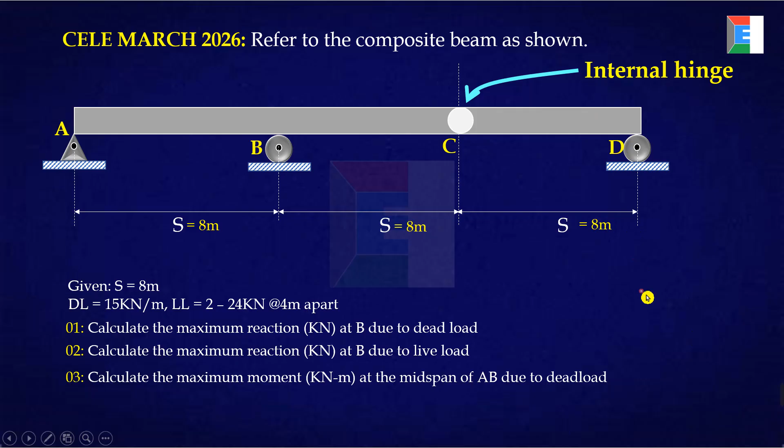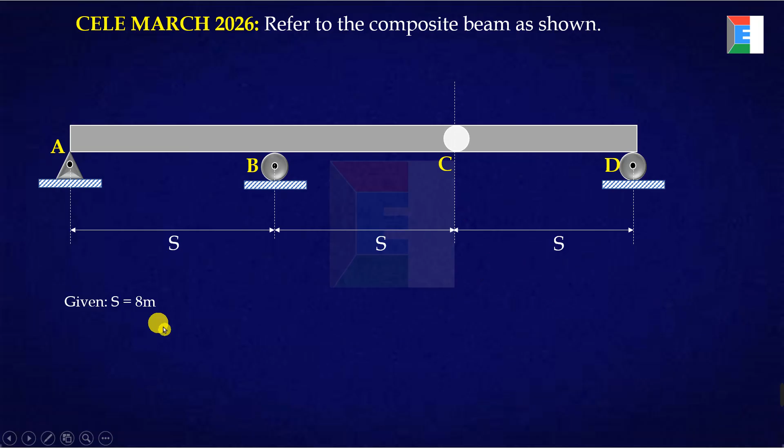Okay, so same problem, referring to this composite beam. The S is still given. So we have this beam, then we have supports here, and we have an internal hinge here. The span is 8 meters.

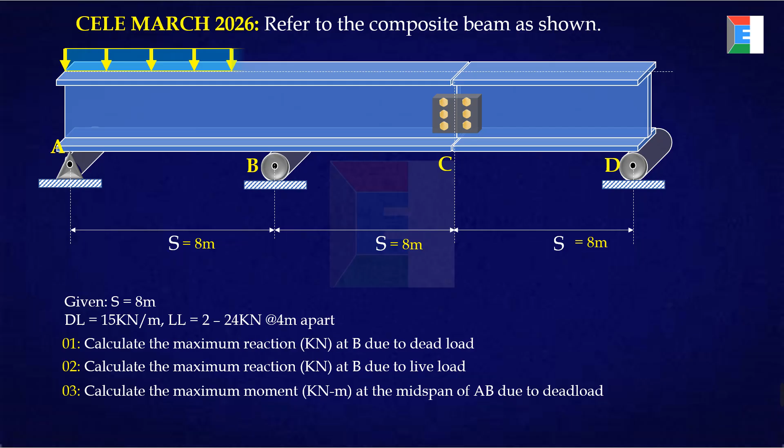Let me put that down first. So let's start with number 1: calculate the maximum reaction at B due to the dead load of 15 kN per meter. When we analyze this, we separate it.

So we have the dead load of 15 kN per meter here. Let's take this part first. This will act as a simply supported beam loaded with a uniformly distributed load of 15 kN. So we have a reaction here, Dy, and another reaction here.

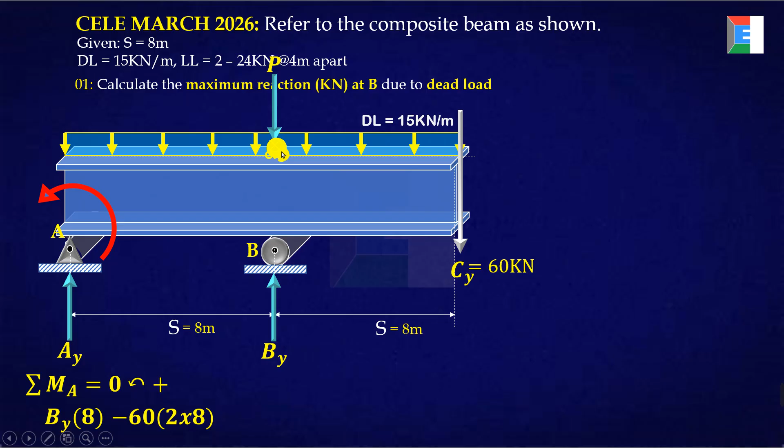So we have 15 times 16 here, and its perpendicular distance going to point A, which is 8. So this is still minus: minus 15 times 16 times 8. Clear? Then we have no other force left.

So we can now set it equal to 0. Using our calculator, let's solve that. Let me double check: times 8 minus 60 times 2 times 8 minus 15 times 16 times 8 equal to 0. That should solve it.

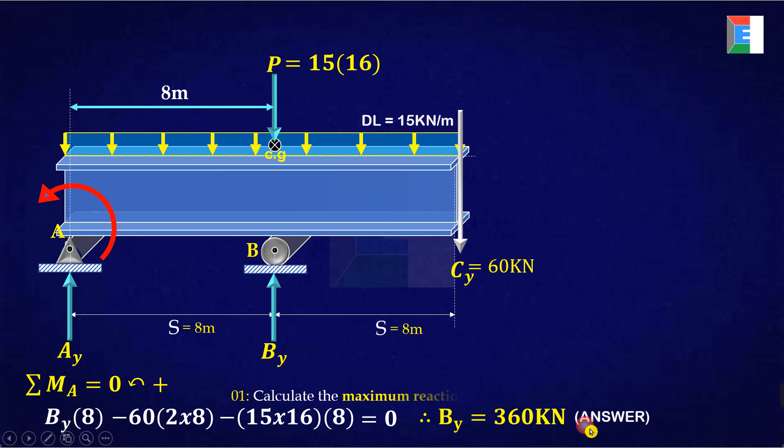We get 360 kilonewton. Since the result is positive, it means our assumption of going up is indeed correct. So By is indeed 360 kilonewton going up. This is our answer to the question about the maximum reaction at B due to dead load, same as the influence line we solved in the previous video. Check that previous video.

Okay, let me also solve for Ay since I'll need it for the moment. I'll solve Ay using summation of forces vertical, going up. So I have Ay going up, and By going up, so that should be taken as positive. I have 60 going down, so that's negative. And I have 15 times 16, which is also going down. I think there's no other force, so we can set it equal to 0.

Then we substitute By, which is 360, here. So it becomes: AY plus 360 minus 60 minus 15 times 16 equal to 0. Using your calculator, the answer you get is negative 60 kilonewton.

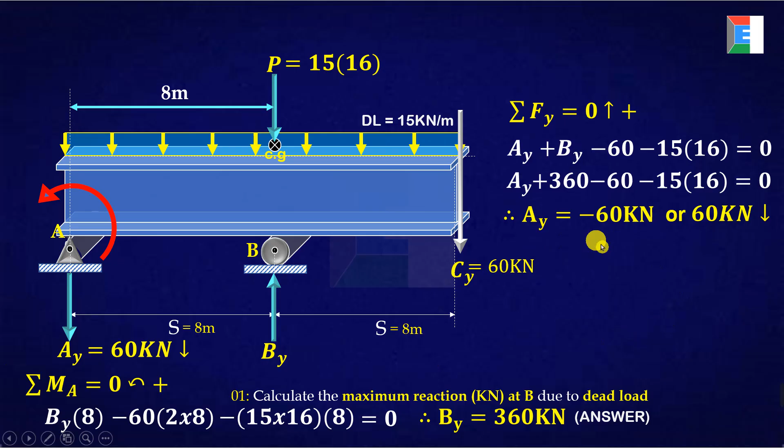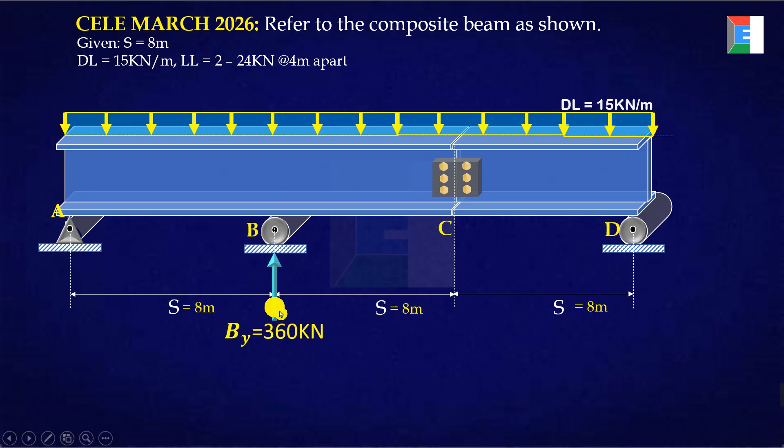Anyway, let's sum up all our support reactions. For BY, we have positive 360. For Ay, we have negative 60 kN downward. And we have 60 here, which is the shear we got earlier for CY. And then here, we have DY.

Ngayon, i-next natin, i-compute natin yung problem, yung part 3, which is to compute the maximum moment at the midspan due to dead load.

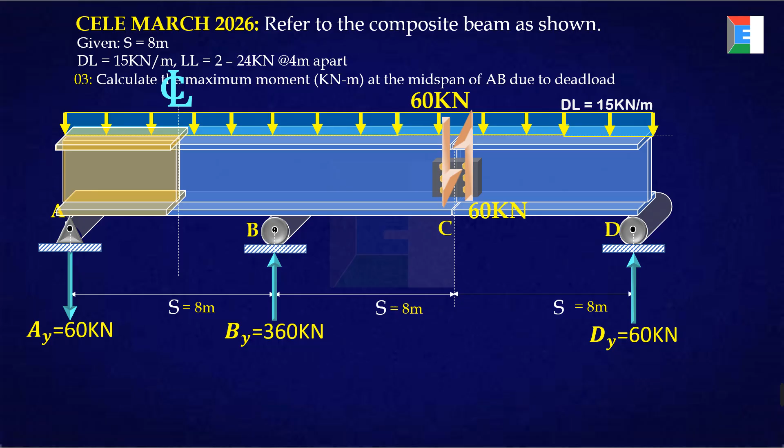Para hindi na ako umalis dito, ganito pa rin. Since gusto natin kunin yung maximum moment at the midspan, dito sa midspan ng AB, yan. Ikakating natin yan para ma-expose natin yung moment, yun yung sinabi ko kahapon.

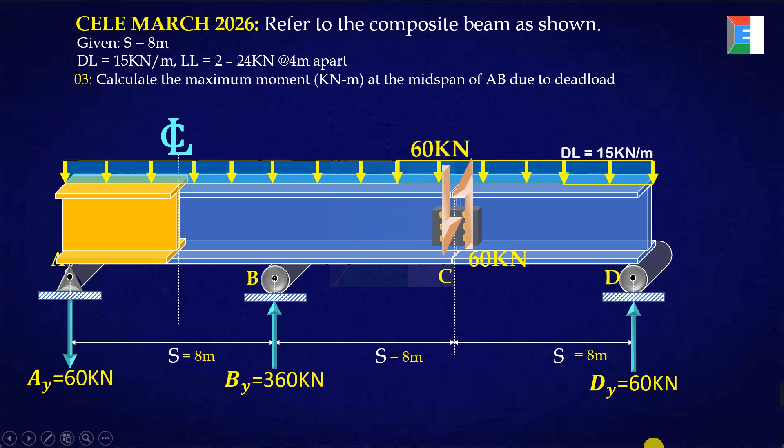Ngayon, since ito lang yung kailangan natin, pwede nang wala to. Tanggalin ko na to, hindi ko na kailangan yan. Tanggalin ko na din to, pati itong mga forces, tanggalin ko na din yan. So ito lang yung matitira, ito siya tsaka yung support dito.

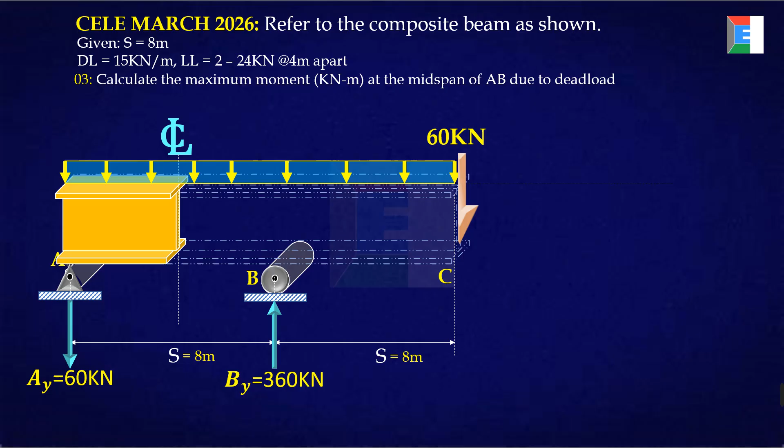Okay, isolate mo lang yung portion na to. Dito natin kukunin yung maximum moment. Ano yung moment dyan?

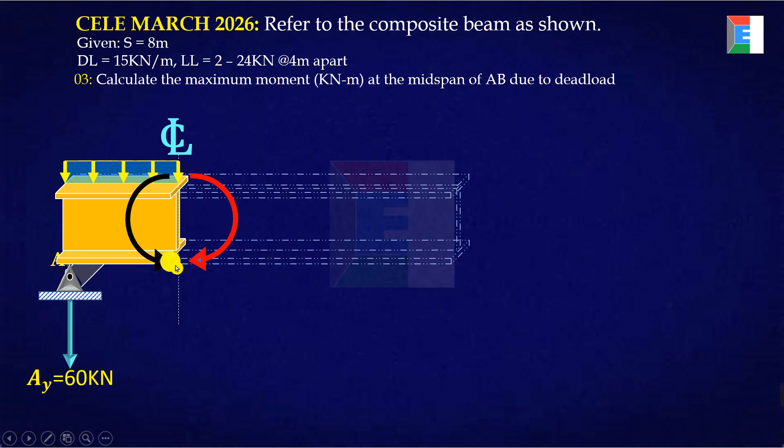Para makuha mo yung moment na nire-resist ng beam, dapat equivalent siya sa moment due to applied load. Kung ito yung beam, sabihin mo na lang ito yung mga applied load, parang meron kang uniformly, tsaka dito. Yung focus mo lang is ano yung moment resisted by the beam, kumbaga yung moment na to should be equal sa moment dito, para maging equilibrium yan. Okay, so yung moment, ito na.

Alam natin na this one is 15 kN per meter. Alam natin yung segment na to, 8 meters overall itong span na to, hindi yung AB, 8 meters yun, so meaning kalahati, 4 meters na. Para makuha natin yung equivalent concentrated load nito, meron kang 15 times 4, located dito sa centroid niya. Dito yung 15 times 4. Ngayon, yung distance niya patungo dito sa midspan, which is half ng 4 meters, so we have 2 meters.

Meaning, meron kang, then iikot sila sa direction na to, which is equal sa moment na to. Kumbaga meron kang 15 times 4 times 2. Klaro? Yes sir.

Okay, ako na lang yung sagot na. Aside dun, meron din tayong 60 dito. Itong 60 na to, ganito pa din yung ikot niya, so which is equivalent sa moment dito. Kumbaga meron kang plus nung 60 times 4. Using your calculator, ma-solve natin 360 kN meter.

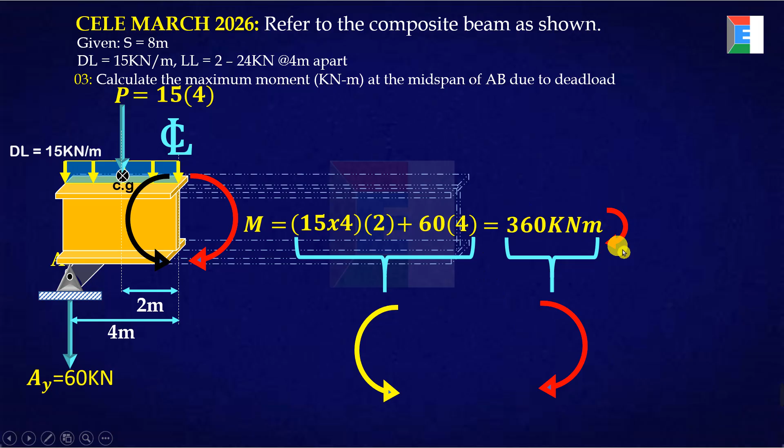Kung makita mo, ito siya itong part na to, 15 times 4 times 2, ito yan. 60 times 4, ito yan. So yung part na yan is ito yan, at itong 360 naman, ito yun dito. Equal lang kasi yung dalawa, ito tsaka ito. Anyway, meron kang 360 kilonewton meter in this direction.

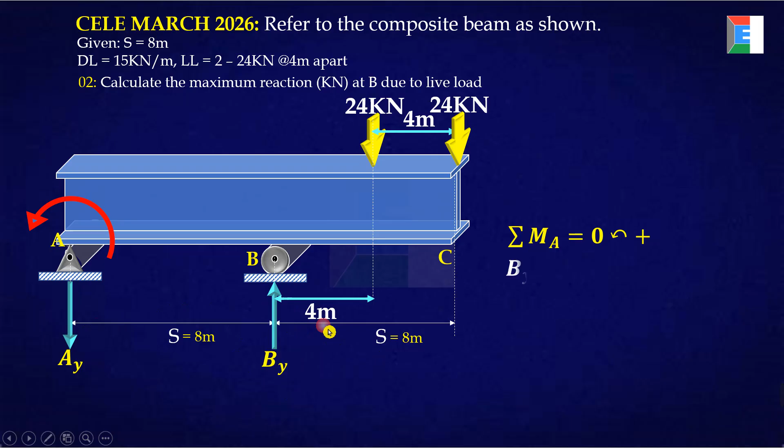Kumbaga meron kang By times yung distance 8. And then ito, baliktad na sa assumption, so it should be taken as negative. So we have negative 24 times 4 plus 8 and negative 24 times 8 plus 8. Pwede rin 12 tsaka 16 yung ilagay mo, it's really up to you. Then pwede na tayo mag-equal to 0, then we have By.

Okay? At ito na yung sagot natin for problem number 2, which is the same dun sa result natin sa using yung influence line diagram. Okay, so anyway that's it na.

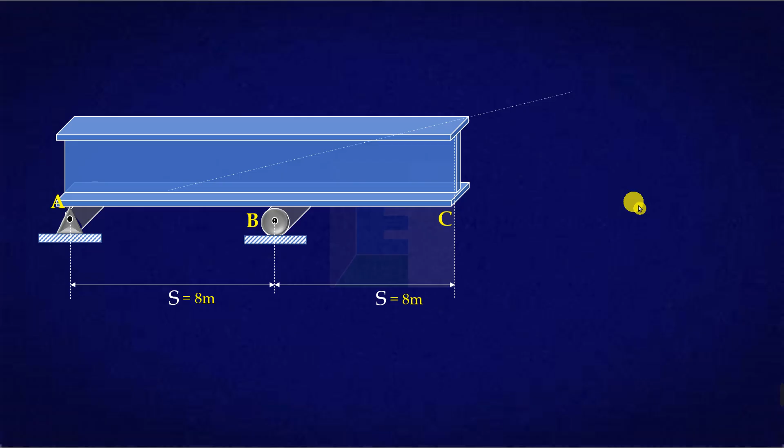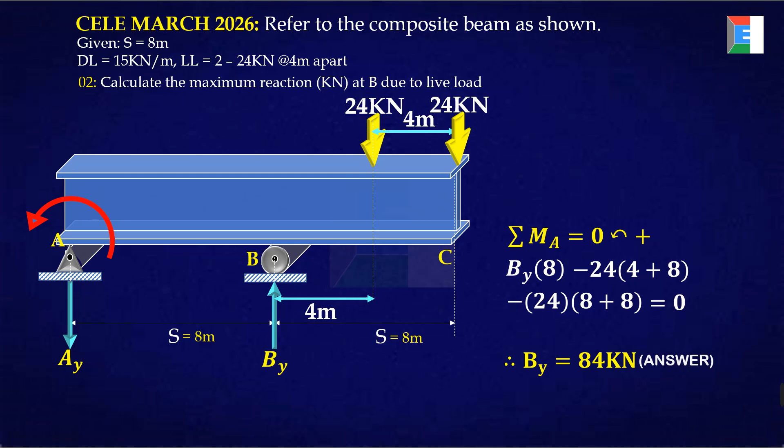Gano'n na. Probably next lecture nito, pang 3 video lang kasi na. So plano ko na extend yung problem. Di ba, ito yung problem natin, di ba, original na. I-extend natin para mas broaden yung knowledge nyo dito.

Then pag tagatagahin natin yan, no? What if ano yung shear dito, yung moment dito, shear tsaka moment. Kasi yung problem, ano lang eh, moment tsaka reaction eh, hindi talaga buo, no? So dito sa problem, extend natin, kunin natin lahat ng reaction, influence line for the reaction, yung sa shear, yung sa moment, kahit anong point dyan, dito ba in between itong dalawa, andito ba siya.

Ganun ba, na? Okay? Pero hindi itong problem na to, masyadong madali naman, so extend natin, no? What if ganyanin natin ba, no? So may overhang pa siya. Ay, hindi pala madali ito, sorry no, so hindi pala madali.

So extend natin yan, ganun pa rin, parang gaganyan yan, no? So 8 meters pa rin. Extend natin yung problem, okay ba? Di ba kayo makagalit dyan pag binago natin yung problem. In-extend lang natin, ginawa lang natin ng medyo mahirap-hirap.

Then, parang madali pa rin, no? So lagyan pa natin ng internal hinge yan, dagdagan pa natin. Okay, so ganun yung mangyayari, no?

So next na lecture natin. Kaso unstable man to, di ba, kasi gigiwang pa yan, eh. So hindi pwede, kasi gigiwang mo man siya. So yung gagawin, dapat may reaction tayong magre-resist dito. So lagyan natin ng roller support. Ayan, so yan yung problem natin, no.

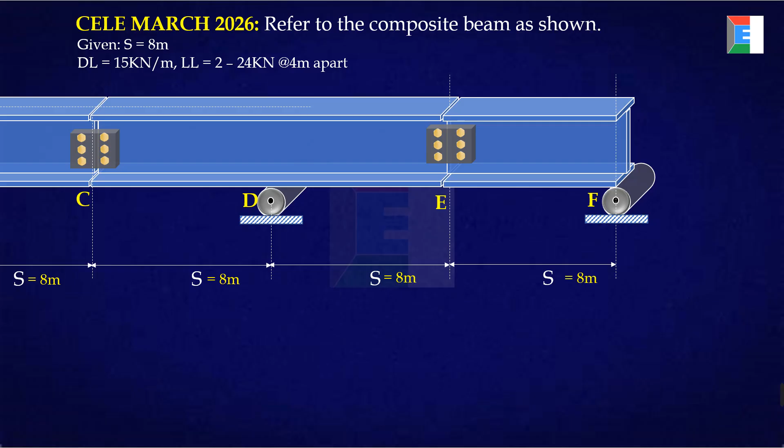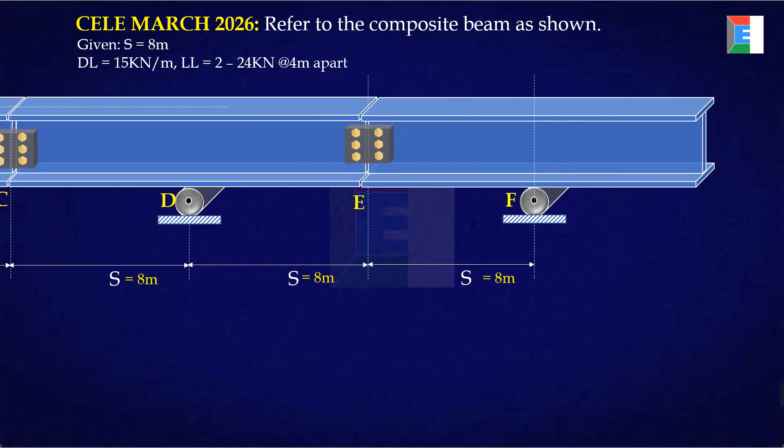Then di pa tayo tapos, so extend pa natin to, yan. Okay, extend natin yan, 8 meters pa rin. Okay, 8 meters pa rin. Okay, so I think yan yung i-discuss natin next meeting.

The same loading, meron tayong dead load na 15 kN per meter and a live load of dalawang 24 kN. Space 4 meters per. Okay ba? So meron tayong 1, 2, 3, yan, tatlong span with dalawang internal hinge and overhang. So that would be sa next na lecture video.